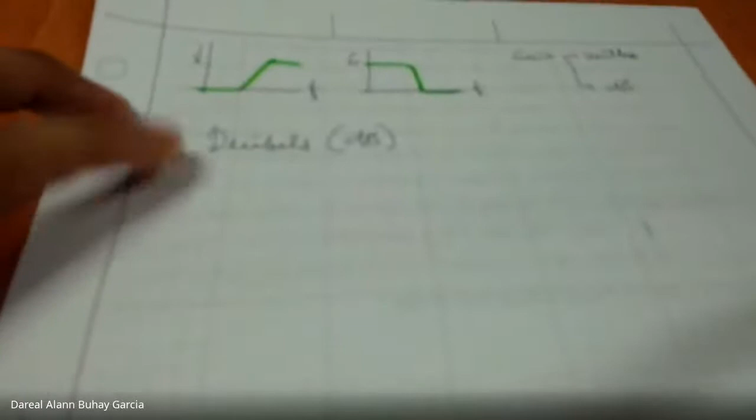Why do you think, aside from just being used to it or it being the conventional way, could you think of or have you observed a reason why it's convenient to express gain or these parameters in terms of decibels? For one thing, yes, it's logarithmic, meaning if it were the actual frequency, then across its whole span, we'd need a large paper or a large representation. So logarithmic scales somehow simplify the graph. Okay, that's one advantage.

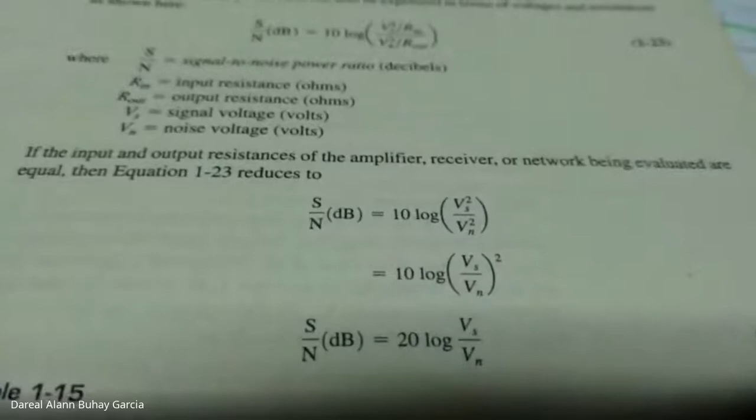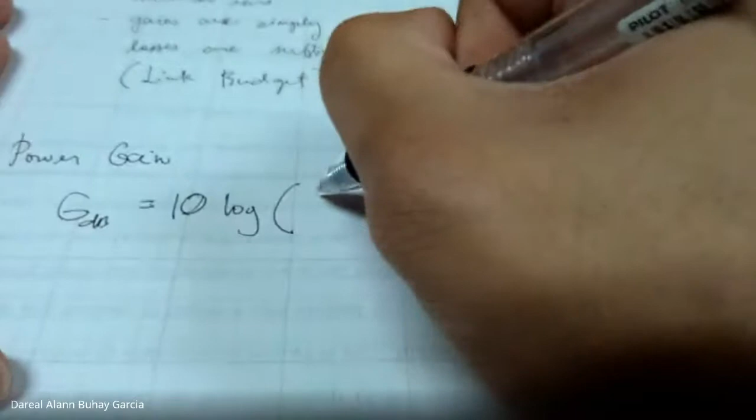This is voltage gain. Pero kung power gain in dB, gain in decibel is equal to 10 log gain, or equal to 10 log P out over P in.

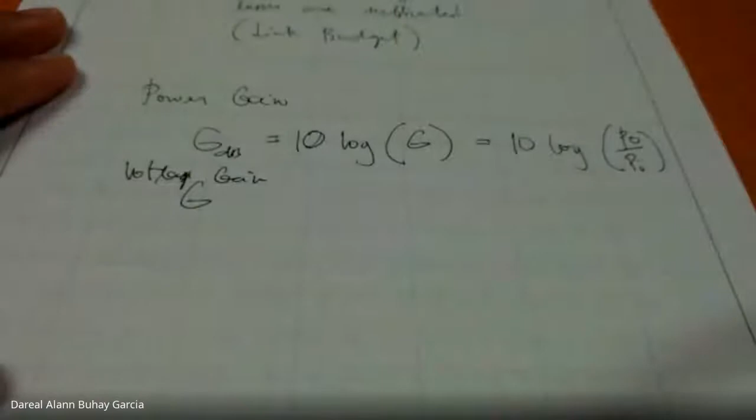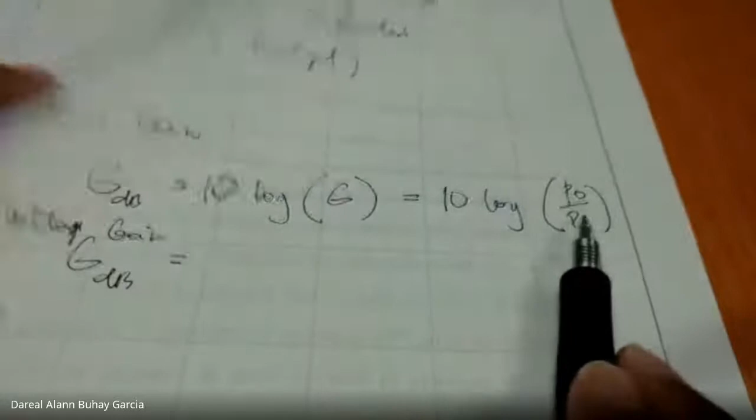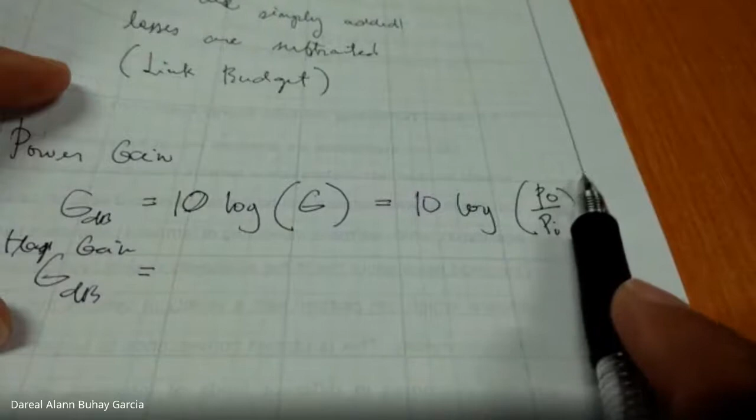How about voltage gain? Power gain man. So how about voltage gain? Kung Ohm's law, change natin yung voltage, P is equal to V squared over R, Ohm's law. But we are speaking of the same system, so maka-cancel out ang mga R. It's VO squared over VI squared. Saka din ang squared. Pero identity sa logarithm, if na-squared, pwede i-multiply sa yung amplitude. So the voltage gain in dB is 20 log gain, or the voltage gain, 20 log VO over VI.

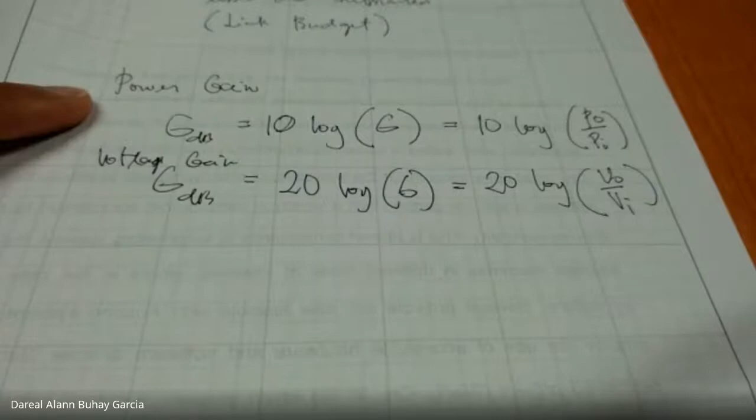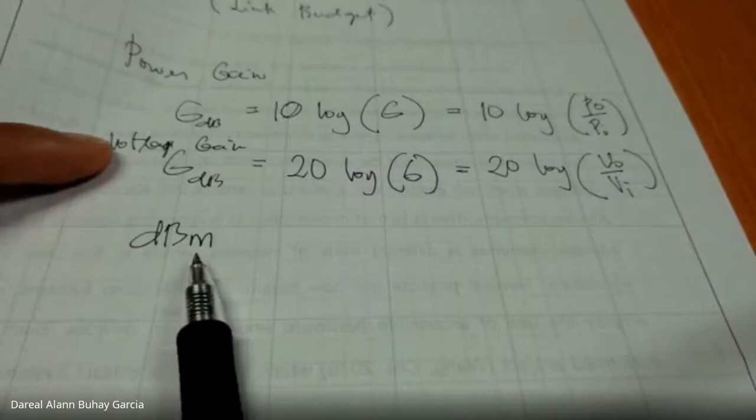Na-encounter nyo ni sa COM, kaning nga mga formula for gains. So sa na part, there's also what we call dBm, the power gain having a reference of 1 milliwatt. So reference is 1 milliwatt, man ni siya ang usually nato makita. Notice na ang power gain is always output over input.

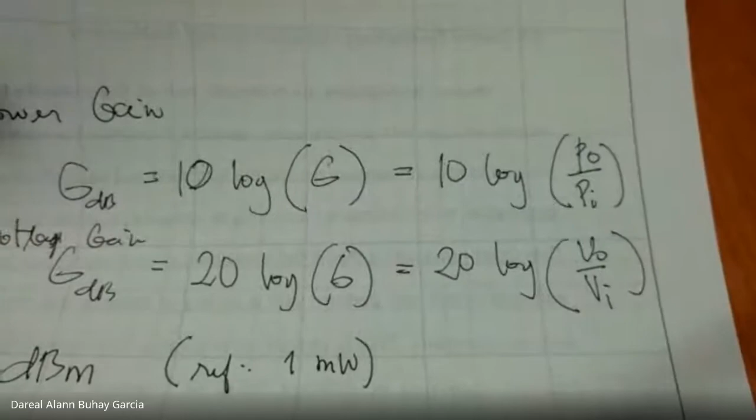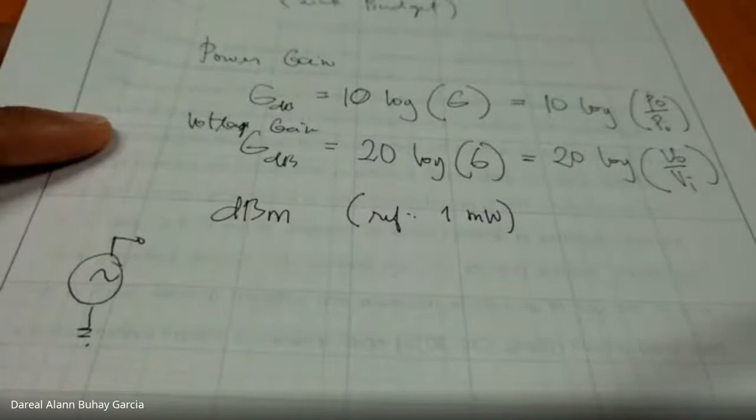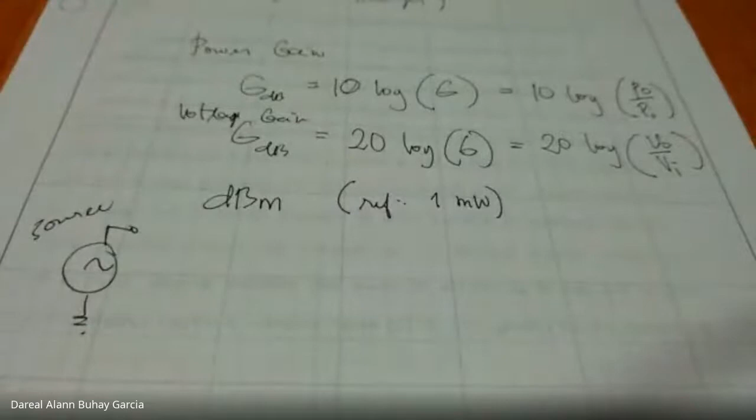Output over input. Now what if we want to express the power source in terms of dB? I-express ang power source in terms of dB. Okay, power source dB. So wala siya VO over VI or PO over PI. Source man siya mismo, di ba?

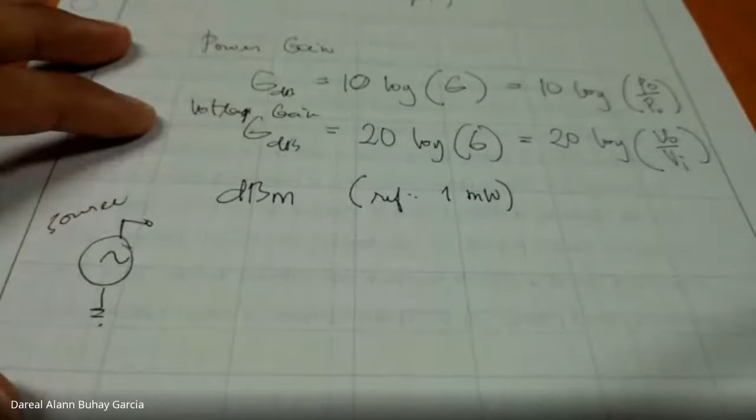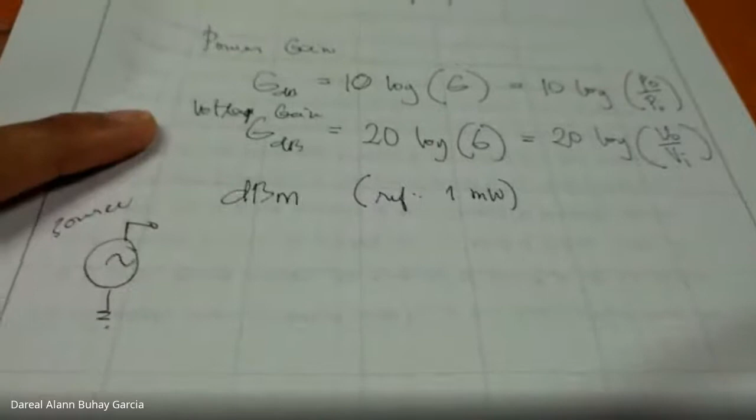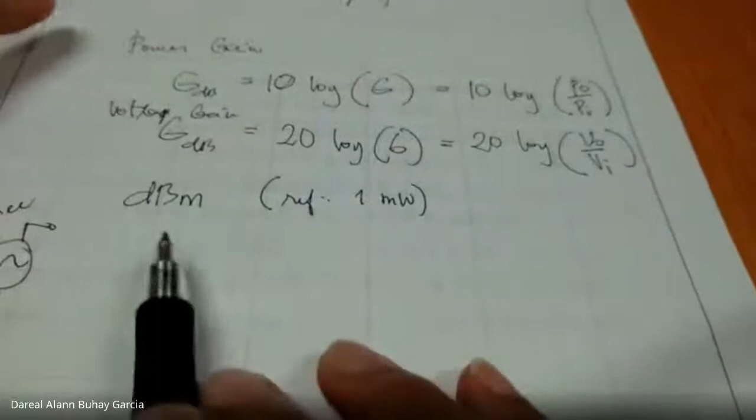So dili na din mo-sulod si unit nga dBm. Although may encounter that, I think may encounter din yun ninyo puhon, pero I think it's better nga ma-introduce na daan today. So dBm is also another measurement of power, specifically power sources, especially signal sources, this may be wireless nga signal, or whatever, electromagnetic signal. So to compute for its quote-unquote gain, quote-unquote, because again wala pa man siya output-input relationship, kay source man siya, pwede na to magamit og 1 milliwatt nga reference.

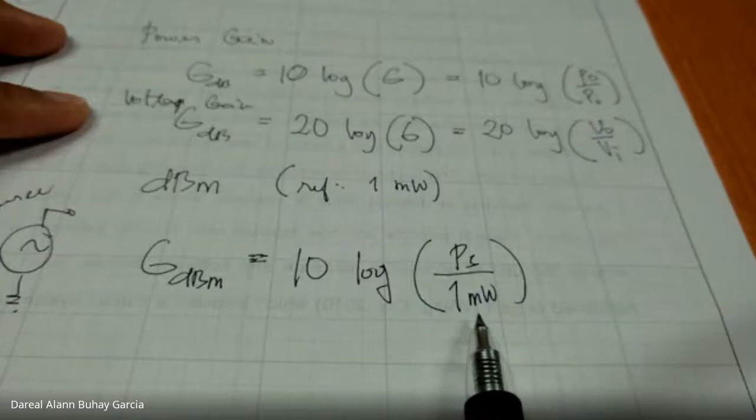Okay, so the formula, parang mangyapon 10 log, but instead of power output over power input, we have the power source divided by 1 milliwatt. So reference lang na siya. Ang output ani equal to, ang power source kay 1 watt. So 1 watt divided by 1 milliwatt is 1,000. So 10 log 1,000, pila man na siya? 10 log 1K... 30. So 30 dBm. Okay, so yan na.

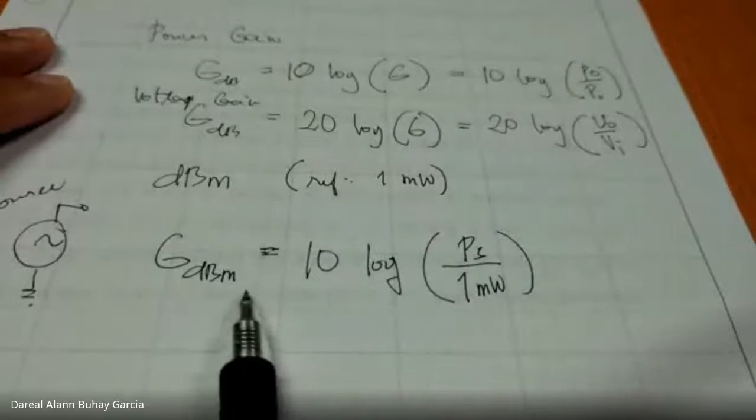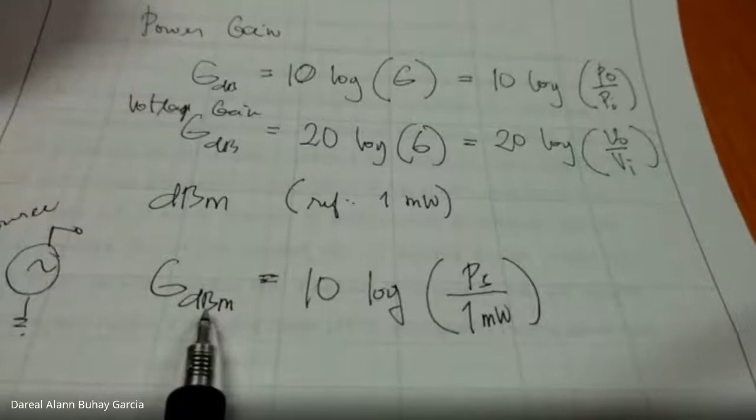Sige lang, karon naman ni mo gawa si dBm sa LX2. For sure, mo gawa siya permi sa communications. Keep in mind lang ni siya. Kung maka-encounter tag dBm, meaning ana, gain na siya, sa isa ka signal source measured from a reference of 1 milliwatt.

Now, before ko mabalik sa akong slide, ito ko i-ikuan. Let's introduce isa. dB level. Okay, so usually, muna itong frequency response.

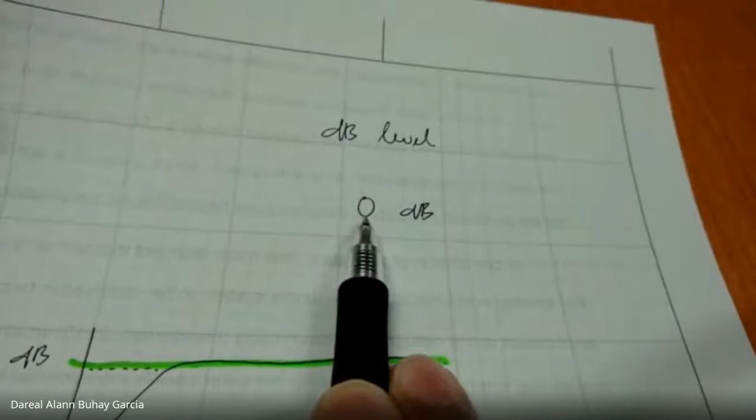So mao ni pagkuan, kabalo mo magamit og anti-log. Divide all sides by 10, then raise to the power of 10 para mawala si log. P over Pi, 10 to the power of 0 is 1. Yes, so P over Pi is 1, meaning gain is 1. Okay, a 0 dB na kuan, 0 dB na gain corresponds to a power gain of 1. Or the usual gain na to, and also, of course, a voltage gain of 1.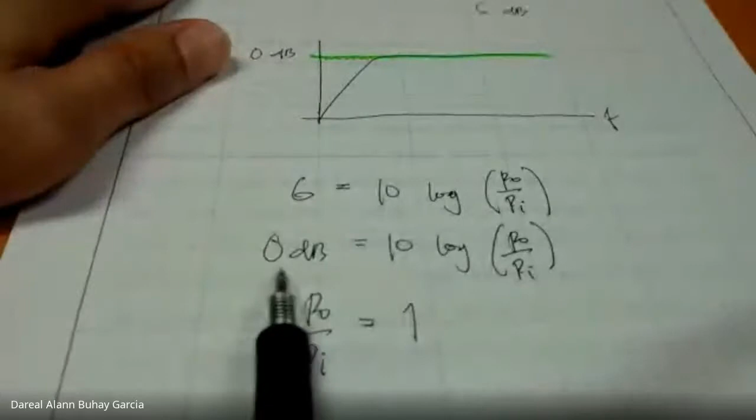No, 0, 1. Now, what if 6 dB? Ilan na siya kung power gain? Yan gapon, no? So kung ato ni kung anong 6, 6 divided by 10, then whatever the answer is, 10 raised to that, 3.98, 6 divided by 10, 10 to the power of 3/5. Okay, 3.98, more or less 4. So nani siya sa mga power gain of 4, more or less.

Good, how about negative 3? Negative 3 dB, and negative 6 dB. So kung tao na sa negative 3, 0.5, correct na siya. Okay, 0.5 meaning mas less si output by half kaysa kay input. Last, how about negative 6? Negative 6 divided by 10, 10 to the power of that is quarter, 0.25.

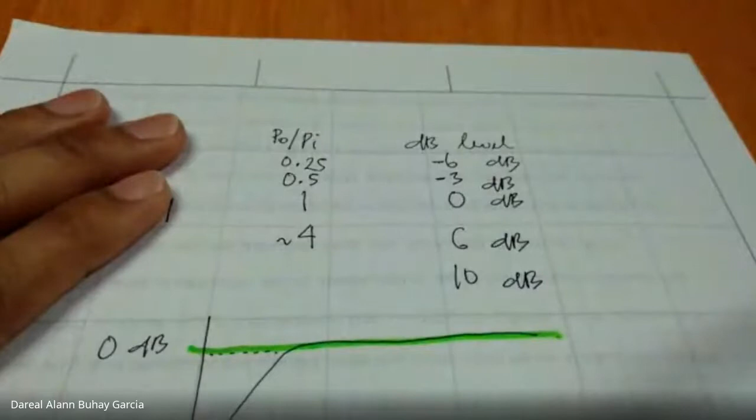Last, 10 dB. So 10 divided by 10, 10 to the power of 1 is 10. So if the gain is 10 dB. Kaya kung power gain, power gain. Now, how about voltage gain? This is also important, again sometimes. Voltage gain po itong given. Okay?

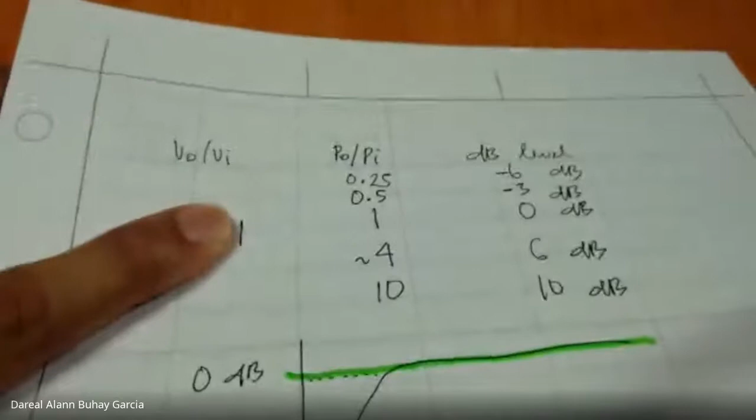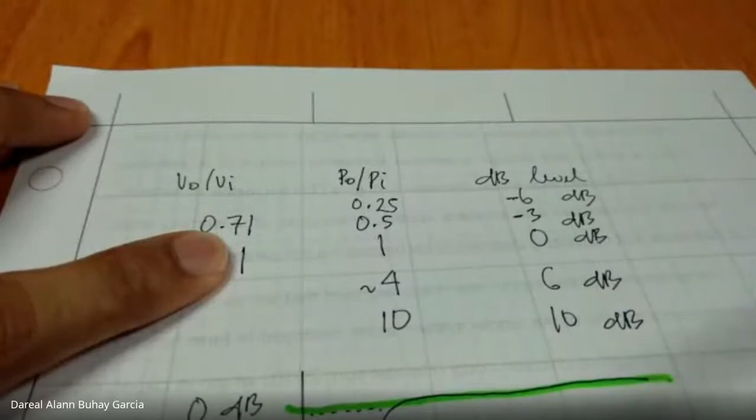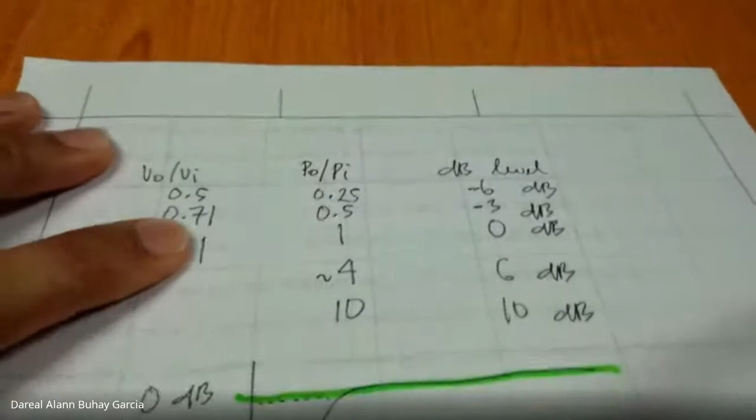So what is the voltage gain kung atong dB is negative 3? Dili naman ni mo ang formula, di ba? Kay 20 log naman, 0.71. So negative 6, .5. Okay, aha. So if ang atong voltage gain is 0.5, 50% compared sa 50% lang sa input ang output nato, that will correspond to a dB gain of negative 6. So important thing ang mga numbers, mga shorthand lang good para sometimes hindi natin necessarily mag-compute.

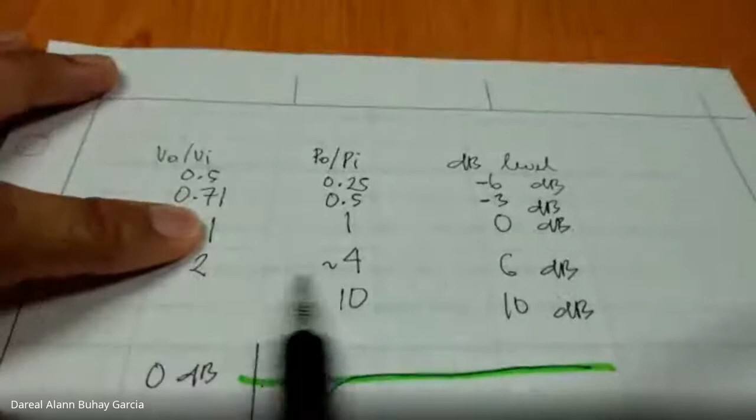No, but 6, I think 2 ni siya. So 20 log 2 is 6, more or less. 6 divided by 20, 10 log ans, 10 to the power of ans is 1.99, so 2. So if 2 ang voltage gain, if the voltage output is twice the input, that will correspond to a dB gain of 6. And lastly, 10.

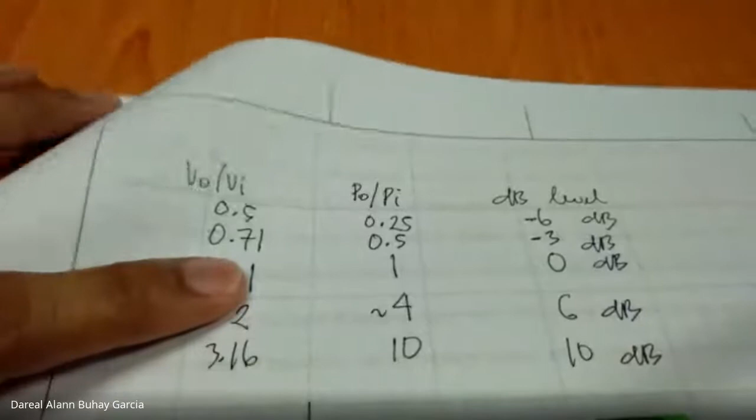3.16. Right, so what does this tell us? Okay, ang atong usually atong tema na at least sa karon na sa context sa atong pag-study sa frequency response amplifier is kung kanus mag one half, mag one half ang mga output over input. Okay, kung ang atong vertical axis is voltage, kung atong vertical axis is voltage, muna ito tanawon.

Kung ano sa nag-half ang power, yeah, kung ano sa nag-half ang voltage, negative 6. Kung ano sa nag-half ang power, negative 3 dB. Okay, so this is significant. Why? Because diha ga depend kung asa atong cut-off frequency, especially ang half power. So what is cut-off frequency? You've heard this term before sa comms, cut-off frequency. So balik ko sa akong frequency response sa high-pass filter.

How do we properly define the cut-off frequency? Who would like to tell the group? For a high-pass filter, what do we mean by the cut-off frequency?

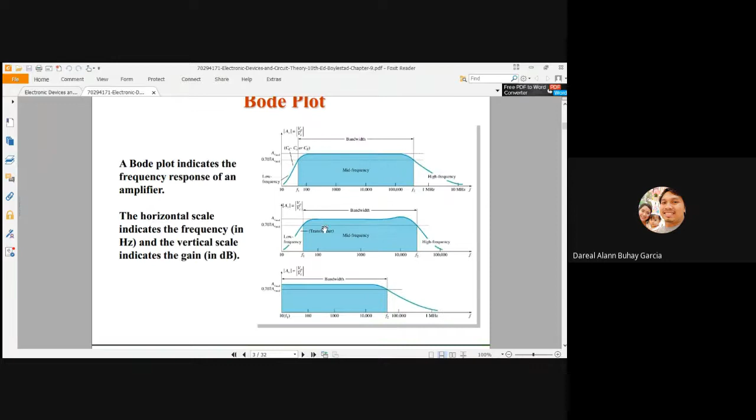A Bode plot indicates the frequency response of an amplifier. Bode plot and frequency response are synonymous terms. The horizontal scale indicates the frequency in hertz, and the vertical scale indicates the gain in dB.

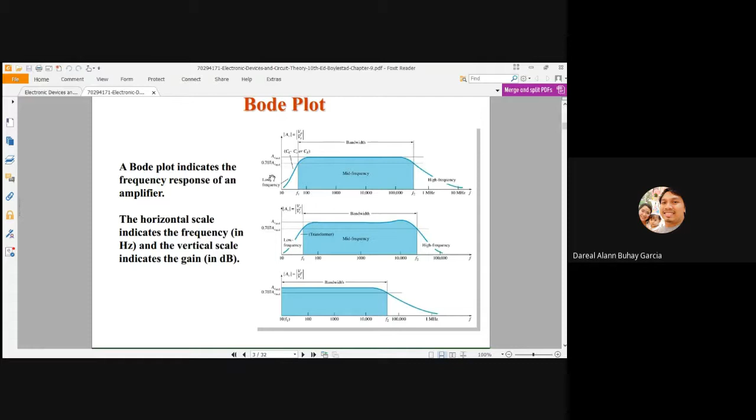The mid-range frequency range of an amplifier is called the bandwidth of the amplifier.

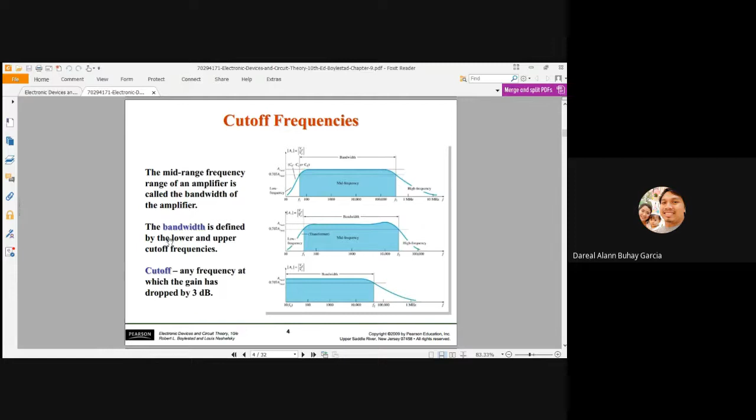Okay. Lagi. Wait. Mess ang akong kuan. Change ako kung kuan na.

Okay, di ba ito - any frequency at which the gain has dropped by 3, or the gain is at negative 3 dB.

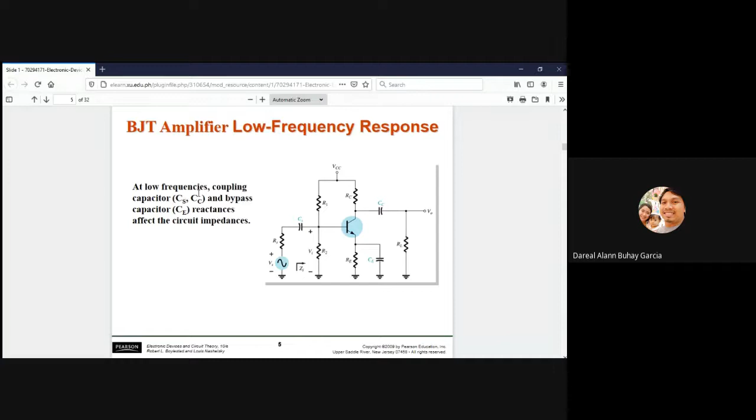At low frequencies, coupling capacitor and bypass capacitor reactances affect the circuit impedance. So how do we compute for the cutoff frequency? Very simple formula: 1 over 2 pi times Rs plus Zi times Cs.

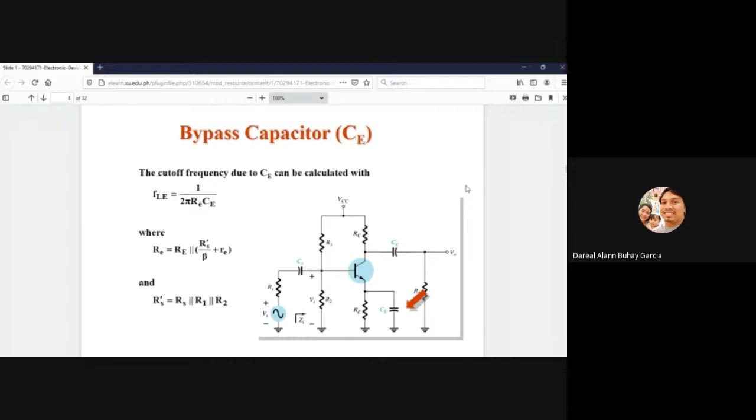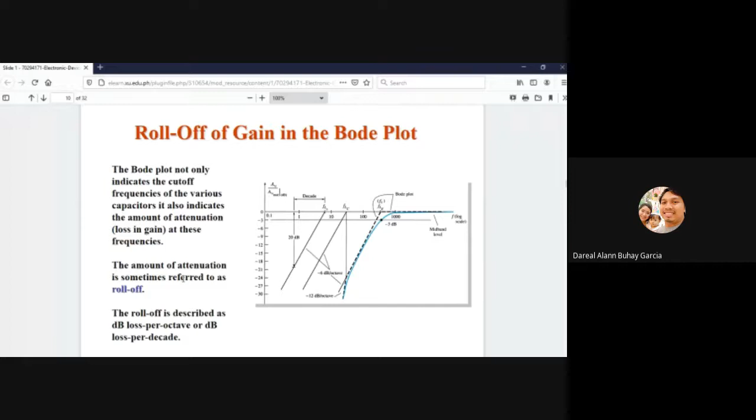So we can measure the roll-off in terms of dB per decade or dB per octave. That's dB per octave on the slide. Let's go over the difference between the two.

dB per decade is for every tenfold change in frequency. In terms of the actual roll-off, there's no difference between the two - you can express a specific roll-off in terms of dB per decade or dB per octave. It's good to know both ways of measuring roll-off. Per decade means tenfold change in frequency, while per octave means twofold. But it's enough for us to know that the higher the roll-off, the better.

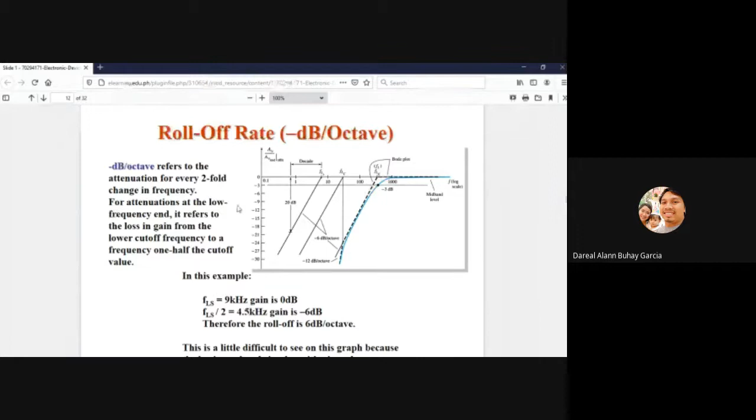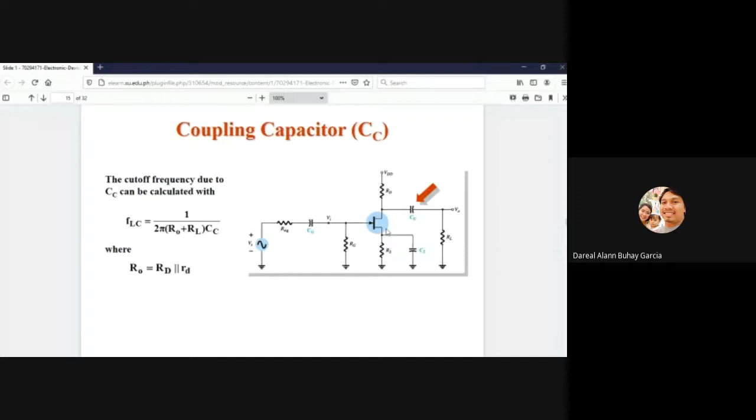That's the coupling capacitor, Cc. CD should be the capacitor at the drain. So it's the same - the capacitor that has the highest lower cutoff frequency is closest to the actual cutoff frequency of the amplifier. The highest lower cutoff.

There's also a phenomenon inside the amplifier or device that we call the Miller capacitance. It happens due to the gain or the feedback capacitor. We can solve for it too - Miller capacitance is 1 minus the gain, times CF, the feedback capacitor, which is given or constant.

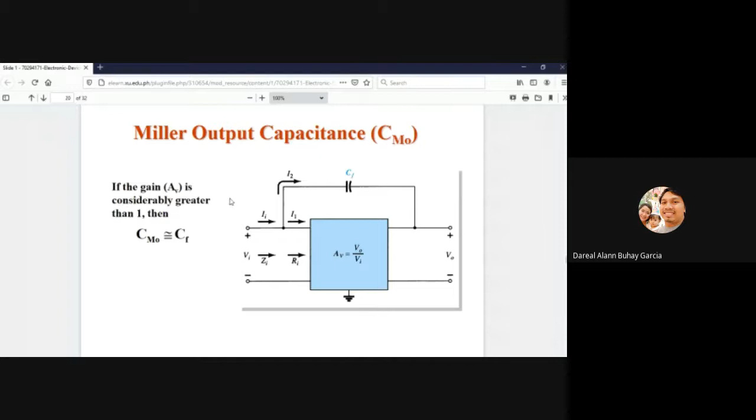So how about for high frequency response or the higher cutoff frequency? Earlier we discussed which capacitances the high cutoff frequency depends on. We have junction capacitance, as I mentioned earlier - capacitance can build up between junctions: base to emitter, base to collector, and collector to emitter. We also have capacitance due to wires.

If we go back to the actual definition of capacitance - any two pieces of metal placed side by side will generate capacitance, no matter how small. So even wires would exhibit capacitance. So we have wiring capacitances, coupling capacitors, and bypass capacitors.

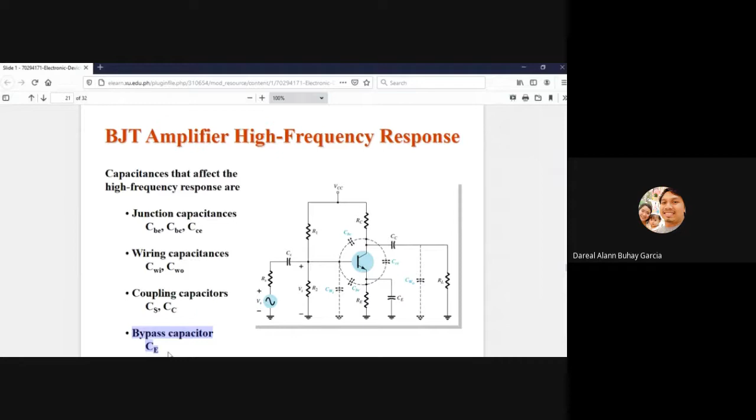So our high frequency response still depends on this. This will be the formula for one of the higher cutoff frequencies on the input side, and this one is for the output side. If you observe, the format is similar: 1 over 2 pi times R times C, where C is the capacitor in question and R is the impedance at that side where we're measuring. So on the input side, in 1/2 pi RC, C is the capacitance at the input and R is the impedance at the input.

Don't worry about the formulas - you don't need to memorize them. It's already given here.

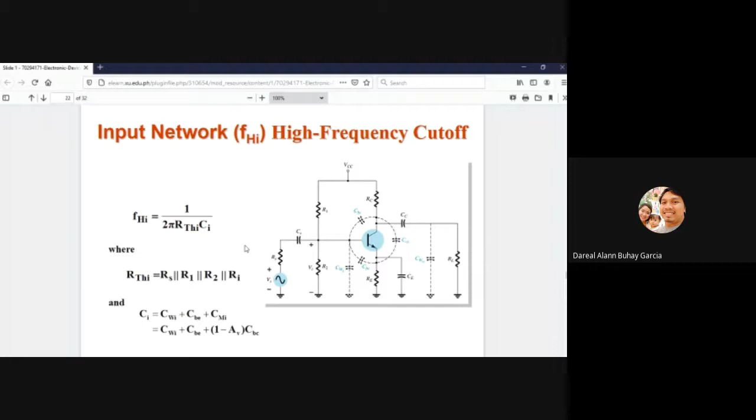You should also know that beta is not constant - beta is not a static parameter, but it also changes. So beta varies with frequency. The hFE parameter, or beta, of a transistor varies with frequency. The frequency due to beta is equal to this formula: 1 over 2 pi times beta times RE times the junction capacitances.

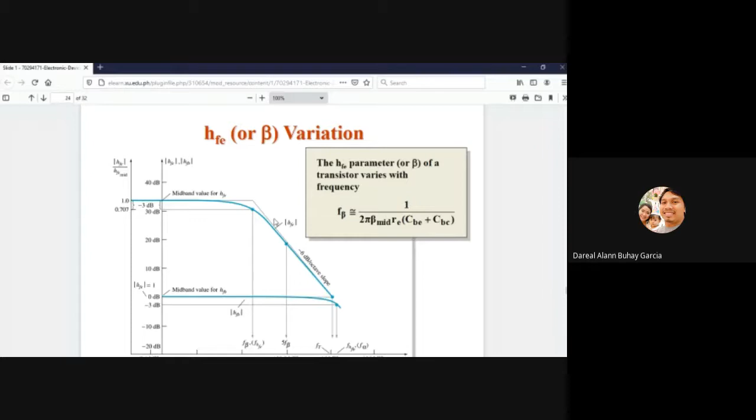That's why, again, we should design amplifiers that have beta-independent characteristics.

So where do we base it? General statement: the highest lower cutoff frequency and the lowest upper cutoff frequency are the closest to the actual response of the amplifier. Okay?

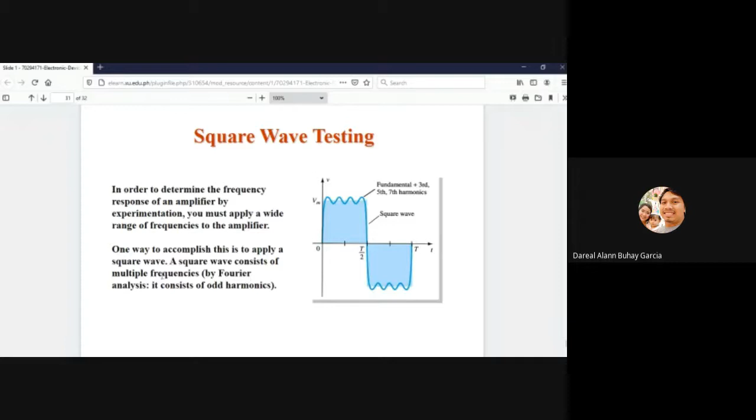One way to accomplish this is to apply a square wave. A square wave consists of multiple frequencies. Okay?

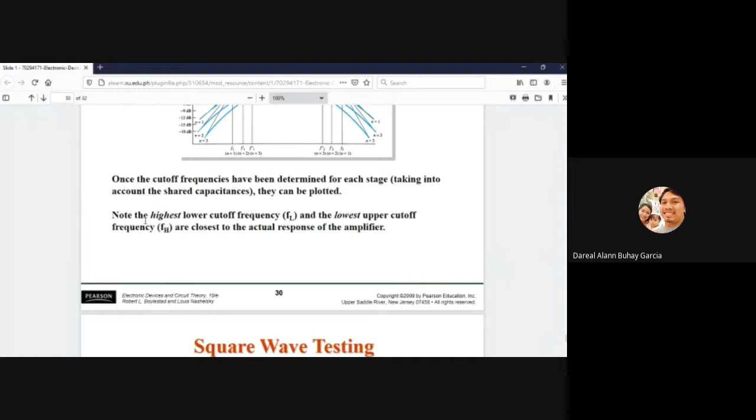Point number two: whether it's an individual system or overall, we always consider the highest lower frequency and the lowest upper frequency. So don't forget this, or this generalization. It's always the lowest upper frequency and the highest lower frequency.